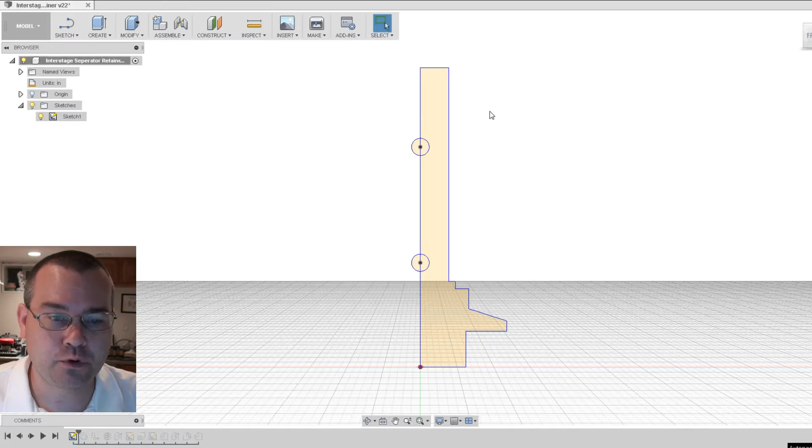Now anytime I see a part that has a round feature to it, I instantly think revolve. So revolve is the easiest way to sketch a round part that has some type of profile to it. So I first started with a sketch, and I measured out the part and then sketched it to generate its profile. Then after we've got the profile, I did a revolve. So very quickly and easily with one sketch, we were able to generate the general profile for the part.

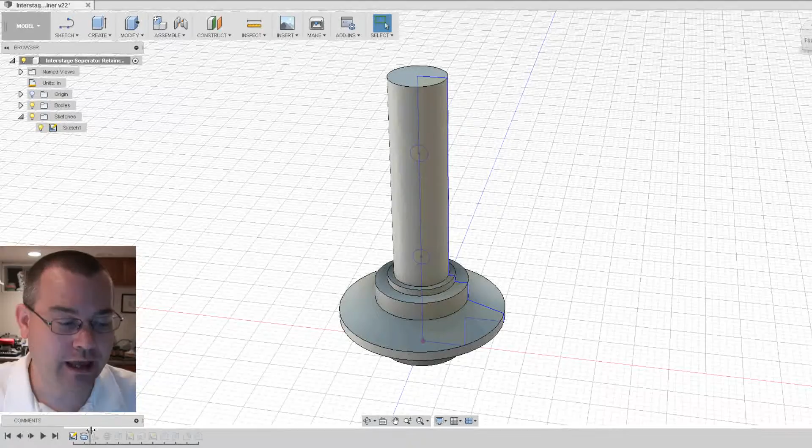Once we have that, it's pretty easy to just go through and start adding the extra features that this part has. So the next step, I made the revolve into a component, and then we added the thread. The thread option on Fusion 360 is actually pretty cool, how you can just do a depiction of the thread on the part. The one thing that I wish that they would do though, and you'll see why later on, is when you tell Fusion 360 to generate the thread but not actually model it, only project it, they don't give you a lower edge here. And that would be pretty handy to have, that lower edge.

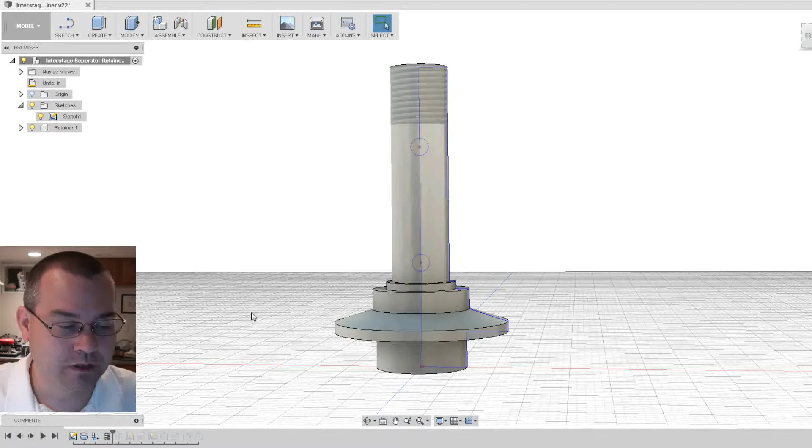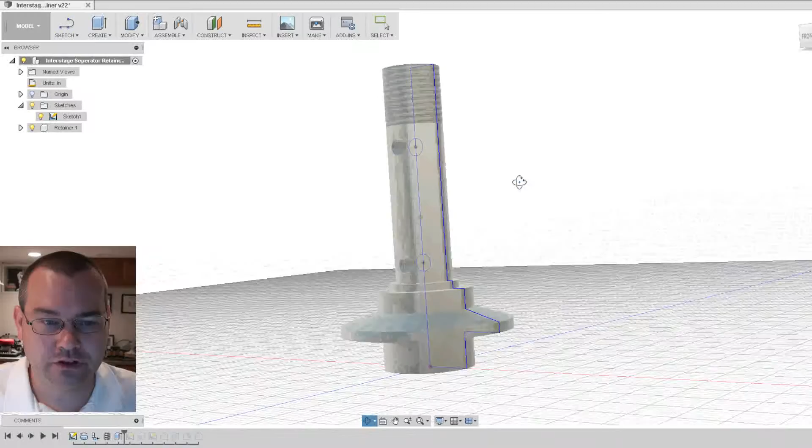So then after we have the thread, we're going to do an extrude. Now what I did is when I sketched the part, I also sketched those cross holes in it that are here and here, and then I just extruded the holes through. Now those aren't too critical. We're actually not going to cam those holes. They're not precise holes, they're not critical holes, they're just for airflow. So I'm just going to put those holes in with a drill press after the fact. So they're not going to be a big deal.

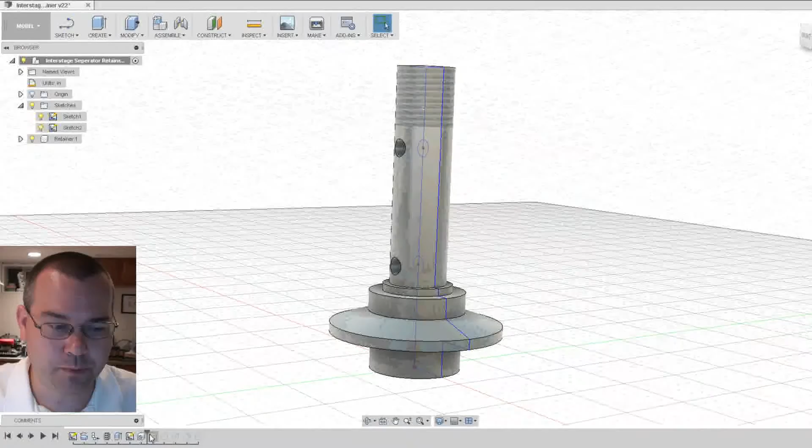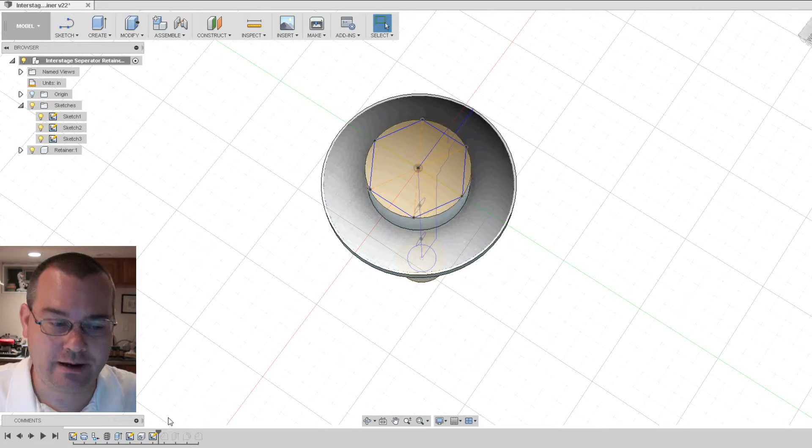So then I generated another sketch, and this sketch is just on the top to make the hole that goes through the part. And then we made a hole there, so there's the hole that goes all the way through the part. Then I generated a third sketch, and that's going to be for the hex bolt on the bottom. Now before you extrude this, I did a chamfer. And the reason why I did this before I extruded it is I have this nice edge right now that I can select and then chamfer. So we add the chamfer first, and then that just gives us a nice looking bolt head when we then do the extrude for the bolt flats.

Now anytime that I'm modeling and I have vertical corners here, because we're going to make this part on a CNC mill, it's easy to just add a radius to it, and now when you profile that part, it will follow the radiuses and deburr the part for you. So anytime you got a vertical surface, it's always good to throw a radius on there so that you get a deburred part right out of the machine. And no matter what machine you have, it doesn't cost you anything. It's just a slightly different tool path that it's going to take.

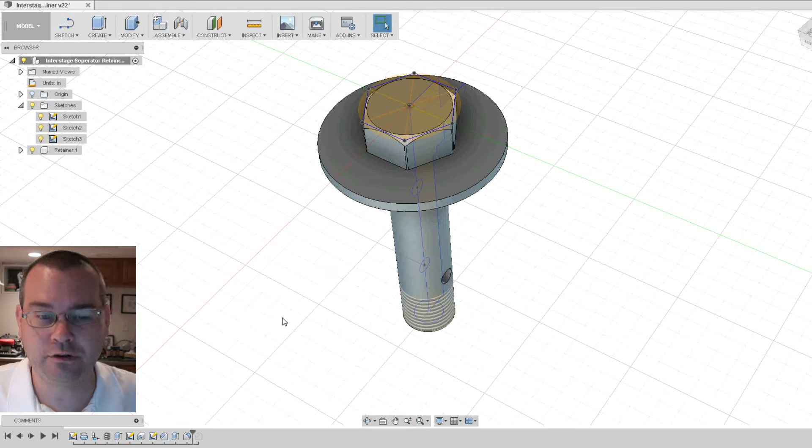And then the last operation is just to put an inside chamfer on this hole here. Now you noticed I didn't chamfer any other edges on the part, and I'll show you why in the cam. This is another weirdity with Fusion that I wish we could get fixed as well. And if you have a sharp edge, the chamfer tool paths are pretty good. They work well.

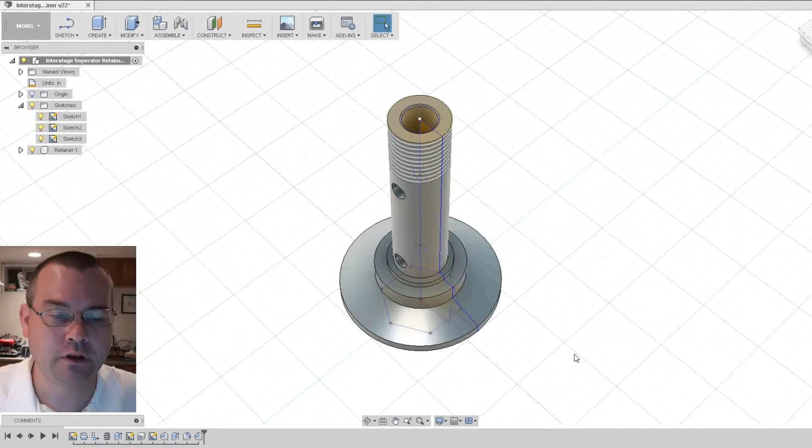But as soon as you model the chamfer, you start getting some weirdness in how you select the chamfer to be machined. And I'll show you that when we go to CAM the part. So there's all the modeling for the part. And again, it's a round part, except for the hex head on the bottom and the cross holes.

This is screaming lathe, but you know what? We got a mill. We want to make the part. We'll make the part. It's not that big of a deal. We'll be able to make it pretty good. We can get concentric circles that are interpolated within about 5/10, so it's good enough for this part.

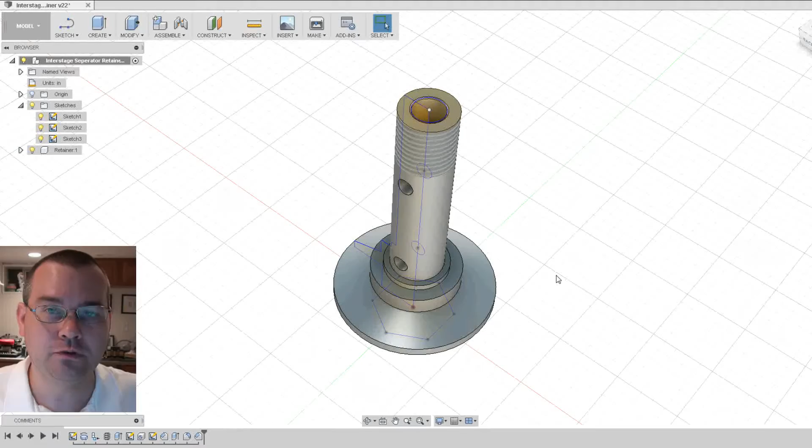So that's the modeling. Let's go over to the CAM side and talk about how we set this up and how we're going to run this part in CAM and then in the machine. So let's do that next. So we switched over to the camming environment, and let's talk about the setup first for this part.

So anytime that I'm going to make a part, the first thing I do is I look at the finished part and I think to myself, looking at this finished part, what's the easiest way to hold this part when it's finished? And that answer drives a lot of stuff. So in the case of this part, my feeling is that holding on to this bolt head is going to be my best option.

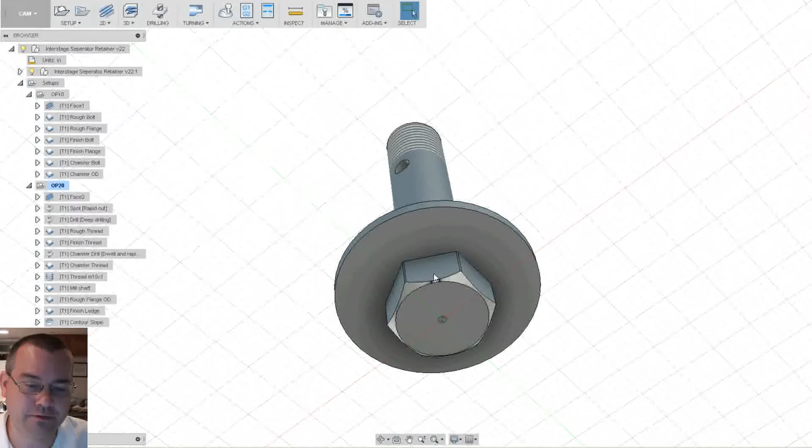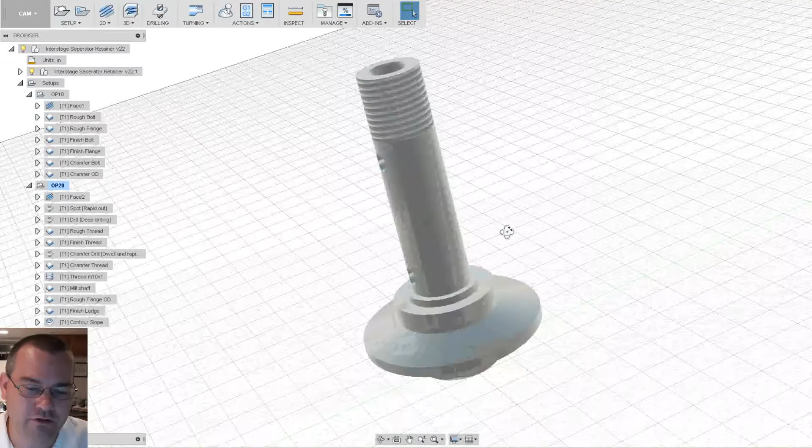So I think what I'm going to do is, almost every part you make is going to be two operations. So I'm going to do this part of the part as operation 1. I call it op 10. And then this side of the part will be operation 20 or op 20. So in my setups, I've got op 10, and then I've got op 20, and I have my stock configured.

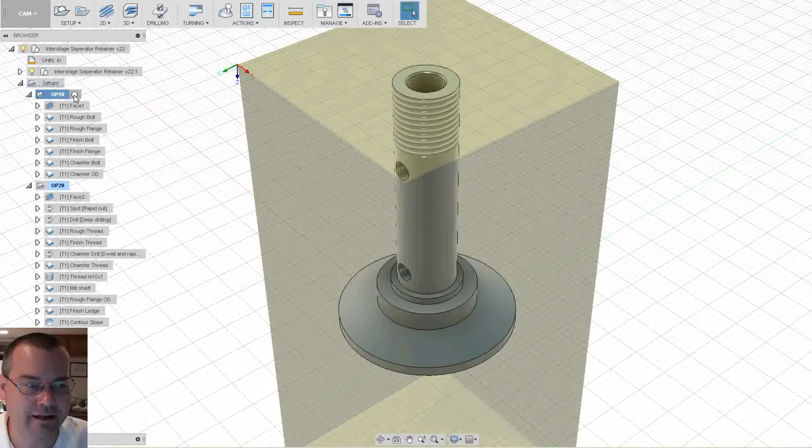Now, I just went out to the back and grabbed just some general stock to make this part out of. So I've got kind of an oversized piece. I'm not going to bother to throw it in the bandsaw. We're just going to go at it with the 2-inch face mill, and we'll just buzz the top of that thing off really quick.

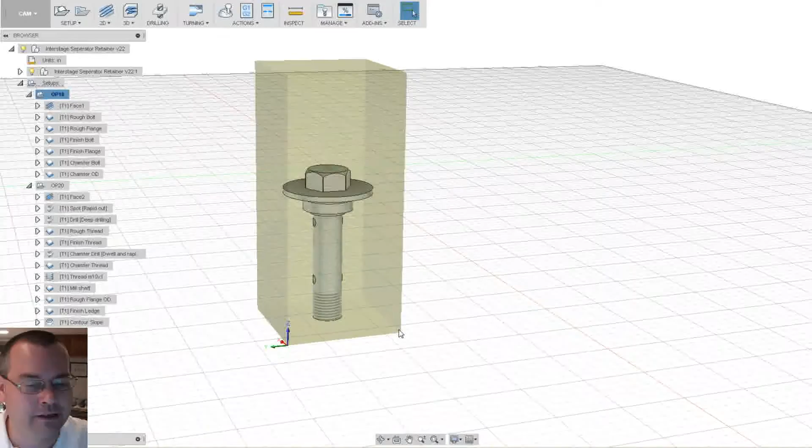So for my first operation, I'm just going to hold the raw stock in the vise starting about here, and then this whole thing is going to be in the vise. So I got a really good hold on this. It's not going anywhere. So I can just go whole hog at it. So we're going to use the 2-inch face mill, and then there's the tool path for it already.

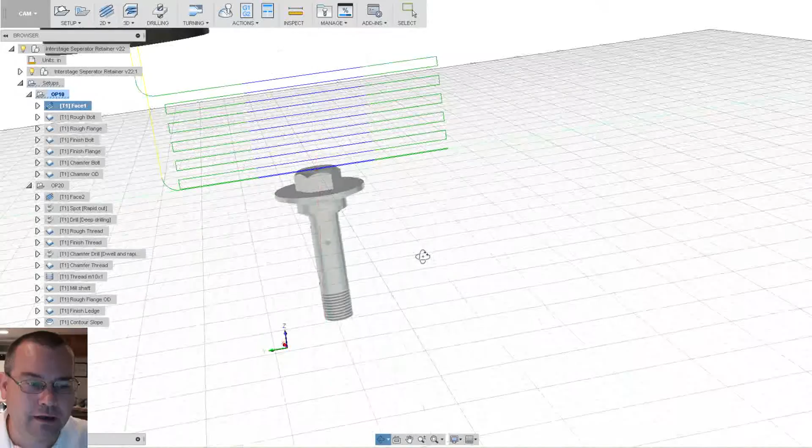And we're going to go at this at like 100 inches a minute with an 1/8 of an inch step down. It's like a 7 or 8 thou chip load. So we're going to throw some power into this thing and just rip the material off. That's all we're going after. And then, my mouse keeps sticking. And then at the end, we'll slow everything down and just do a finish pass so we get a nice finish.

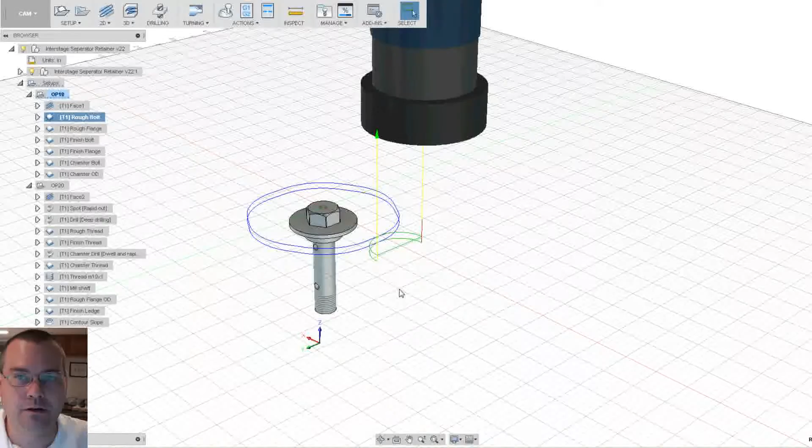After that, we're going to stick with the same 2-inch face mill and then rough the stock out. Now, a lot of people will want to switch to tools that are more right size for the task. In my mind, right size tools is the biggest tool that I can fit in there to get the highest rigidity and just rip the material out of there.

Again, we're going to take 100 inches a minute, we're going to step down an 1/8 of an inch, and we're just going to get rid of this material. We've got a good hold on the part, we got tons of rigidity in the tool, it's an insert-based tool, so we get good tool life, lower costs. We're just going to rip the material off. Why change tools?

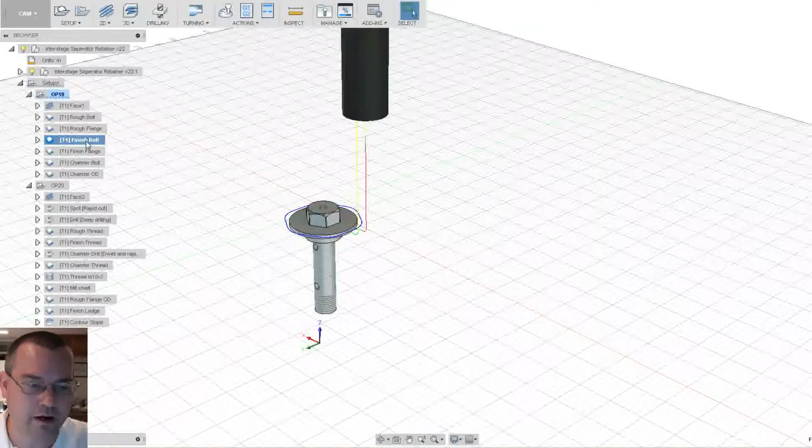So we're going to do that with the bolt, we're going to do that with the flange, and then now we're going to switch over to a finishing mill. So we're going to switch over to a 3/4 inch square-ended standard end mill. We'll walk around the bolt head, we'll walk around the flange, then we'll add the chamfer to the bolt head.

Now, here is where the chamfer thing comes into issue. You've got two options when you're doing chamfering in Fusion 360. And option one is the 2D chamfer toolpath.

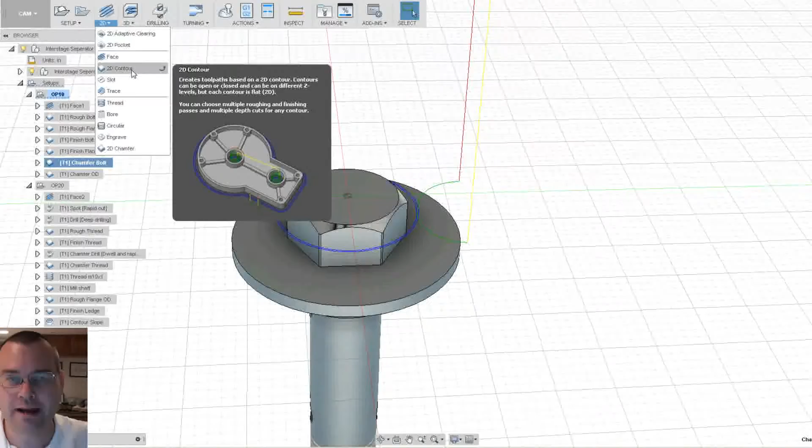Option two, before 2D chamfer appeared, was that you do a 2D contour, and then when you select the chamfer tool for 2D contour, it allows you to specify the chamfer width, just like the 2D chamfer toolpath. Now the difference between the two of them is that if you do a contour and there's an obstruction in the way from like a corner or another sidewall of the part, or the part goes up a little bit where the chamfer mill will run into it and smack it, the 2D contour won't detect that and it'll just break the chamfer mill off for you. So you got to watch out for that.

The 2D chamfer toolpath won't do that. It will detect that, oh hey, there's a wall there, or there's another feature on the part there that's preventing the chamfer mill from safely making that geometry, and it will stop and walk the chamfer mill out for that instance of the profile. So those are the differences. There's pros and cons to each one of them, and I use them kind of interchangeably depending on what I'm doing. If you have the chamfer modeled already, I find it better to use the contour toolpath rather than the chamfer toolpath.

And then to get it to work, for some strange reason, I use this stock to leave, and I set the stock to leave to the same as my chamfer width, and I select the top of the chamfer. And what the stock to leave will do is it will force the toolpath to go to the outside of the chamfer, and then the chamfer will be correct and your toolpath will end up correct.

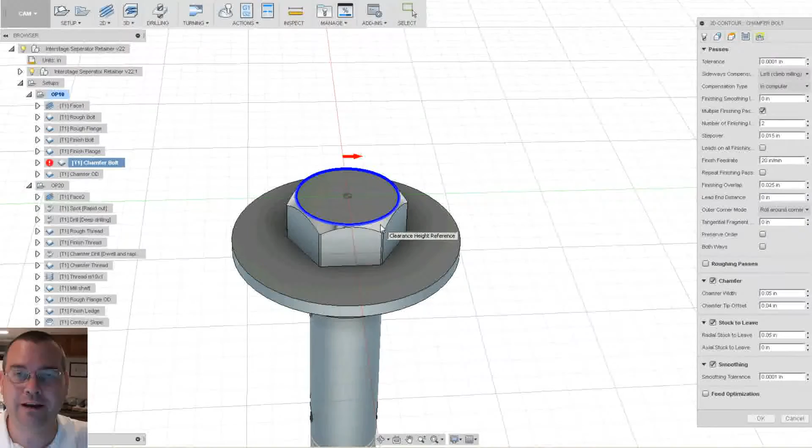So it's kind of weird how it works when you have the chamfer modeled. Other CAM packages that I've used, you just click on the face of the chamfer and it does it. I don't know why Fusion doesn't do that, but you know, it would be nice if we could just click on the chamfer face and bam, you got a chamfer. So that's the kind of weirdness for the chamfer.

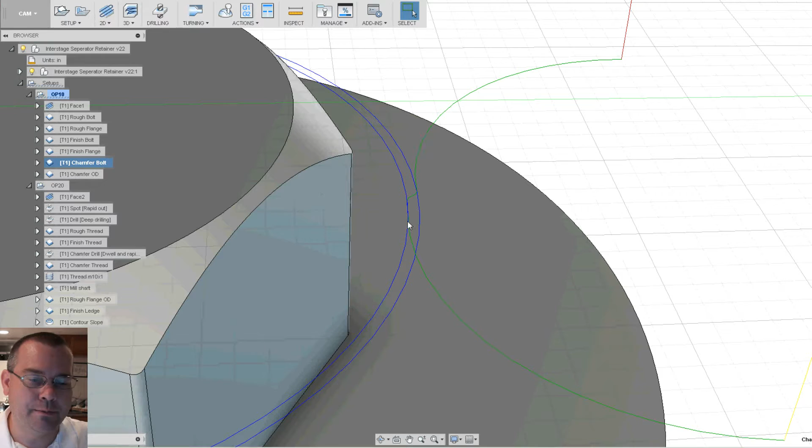The other difference is, if you notice here, I'm going to go around the horn twice here. And the reason for that is that's a 50 thou chamfer. I'm using a 1/4 inch chamfer mill. It's a little bit too much material to bite off in one shot without chipping up your carbide. So I'm going to take 2 whacks at this to finish it up. The 2D chamfer toolpath won't allow you to take multiple passes. It's just not in there. Okay, so again, that's the difference between contour chamfering and 2D chamfer toolpaths. Use whichever one's going to work for your specific instance.

So then after we chamfer the bolt head, we're just going to throw a chamfer on this edge here. I try to do as much chamfering as I can in the machine. Let the machine do the work for you. Put the material in, press the go button, get as close to a finished part out as you can. Okay, so that's going to be our first operation.

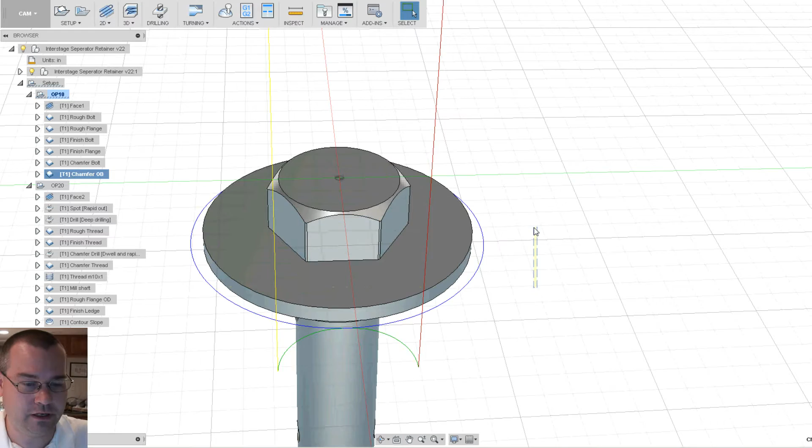Now, for my zeros, if we highlight our operation, you'll see that my X, Y, and Z zero are on this back corner. So when I go to put this in the vise, I'm going to set the 0 in the machine as the bed of the vise, and then I'm going to set my XY0 to the back corner of the jaw, and then I'll put a little hunk of metal over here to space it so I don't cant my jaw when I tighten down on this. Then I just throw the material in, tighten up the jaws, press go. Got a good 0, we're good to go.

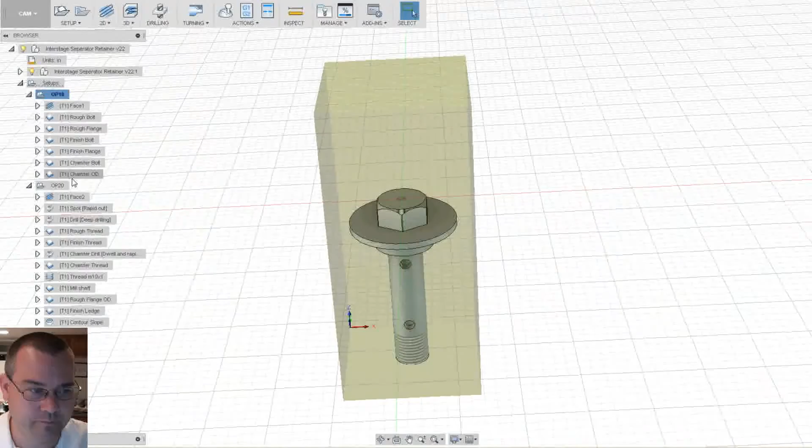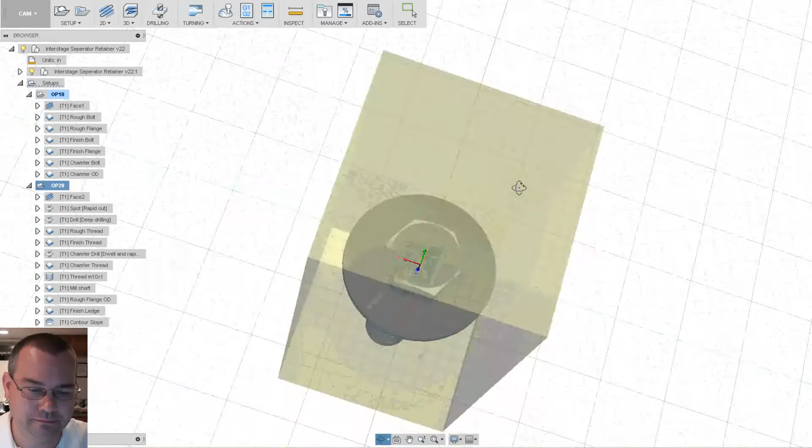So now once we have that operation done, it leads us on to Op 20. Now Op 20 is going to be a little bit more difficult. What I did here is this plane is going to be Z0, and that's going to be the top of the vise jaw. And then I made the XY0 the center of the part. And the reason why I did that specifically is so that when I flip the part over, I'm going to have a pretty good surface here because I actually drove this toolpath for this contour down past this flange as low as I could go without hitting the vise jaws.

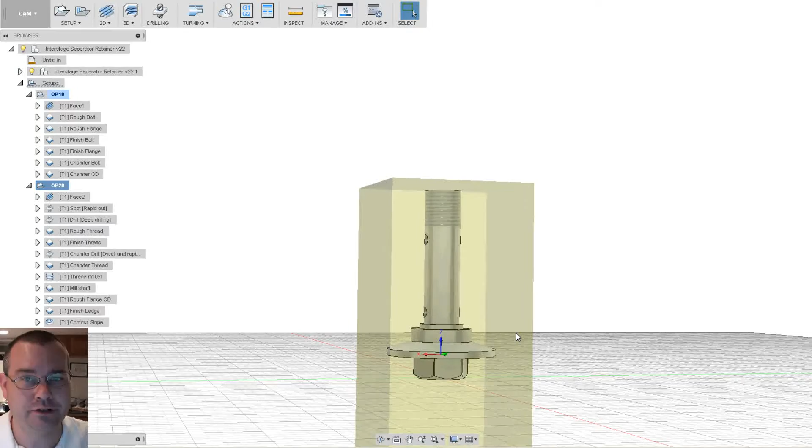My vise is just a Kurt D688, so the jaws are roughly 1.75 inches tall. So that's what I use for a number so that I make sure I don't run into my vise jaws. I don't make the extra effort to model the workholding unless I'm doing fixturing or some complex workholding. If I'm just putting the part in the vise, you know, if you're having trouble figuring out what your vise jaw clearances are, maybe we should study a little more.

Okay, so what I'm going to do is I'll just take a test indicator and just sweep this bottom part and then zero in that way. So that's how I'll find that zero.

Now the top of this part is actually pretty challenging. And it's not challenging because it's complex geometry or it's hard to make. It's challenging because you need to think about rigidity and chatter. If you recall our 100th subscriber plaque, we underestimated our rigidity a little much, and we got some chatter with the big face mill we were trying to do. So anytime you make a part, you have to always keep this in the back of your mind.

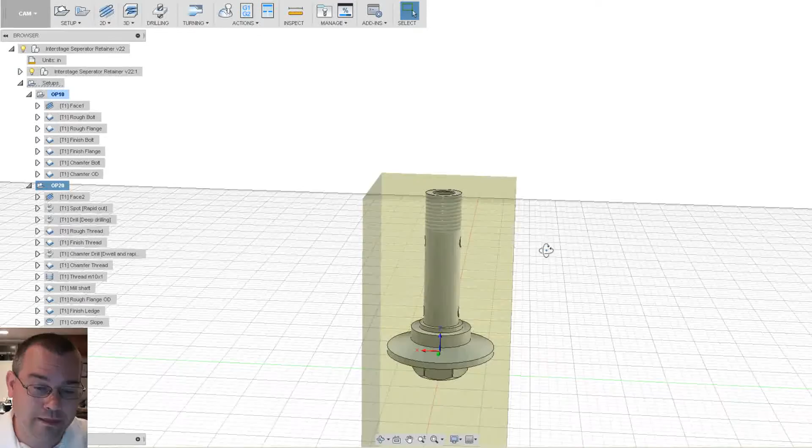When this is in its raw form of stock, this is about 1¼ inches by 1¼ inches, and it's sticking up about 1.5 inches. That's going to be pretty rigid. It's not going to be bad. As soon as I rip all this stock off and get down to this tube here, which is about 1/4 inch in diameter, the rigidity of the part is gone. It's gone. So we want to think about that during our machining operations.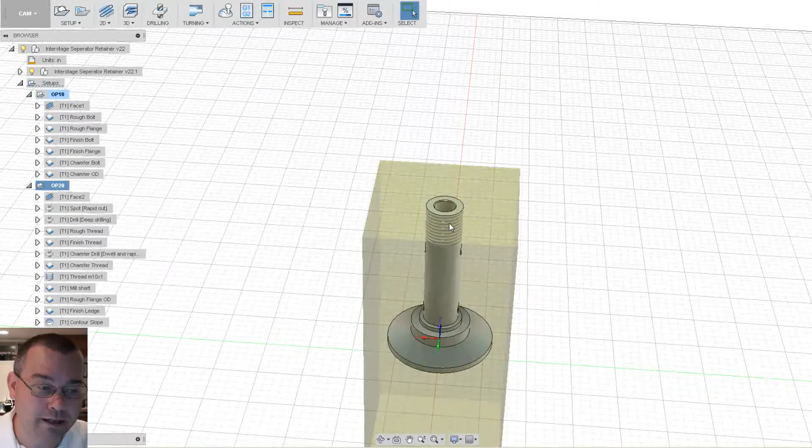And if you're doing lathe work, same thing applies. As you turn this shaft down, this is going to start getting flimsy. Okay? So we want to keep that in mind while we're doing our tool paths. So what we're going to do is first, we're just going to face it. We left a little bit of stock from op 10 on the bottom, just to get rid of our saw marks, square it up real nice, and face it. Then after I face it, I'm going to spot it and drill it.

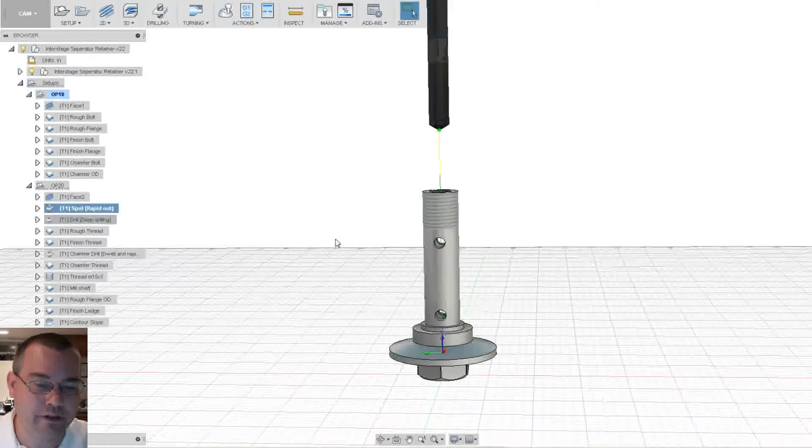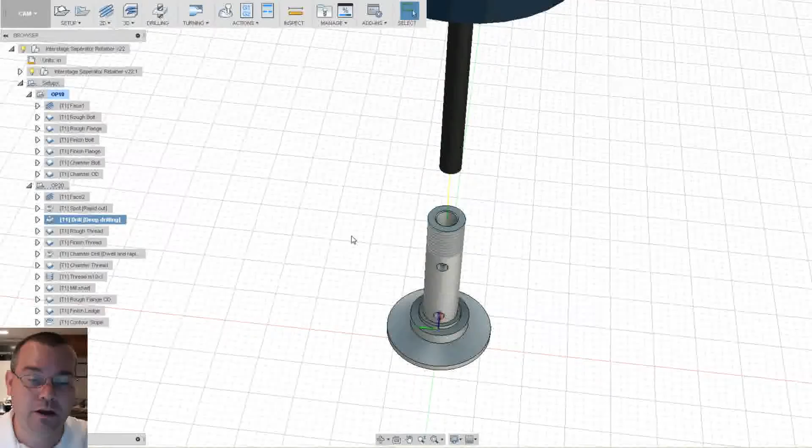Now why would I want to drill the center out first? Well, a tube is much more rigid than a solid bar. And if you don't believe me, you can do some experiments. You can take a solid rod and a hollow rod and support each at each end, and then put the same amount of weight on each of them, and you'll see that the solid rod will sag much sooner than the hollow tube. The hollow tube typically won't deflect, it will just catastrophically fail. So by drilling this hole first, we're going to help our rigidity problem. So that's why this is one of the first operations, to drill the hole.

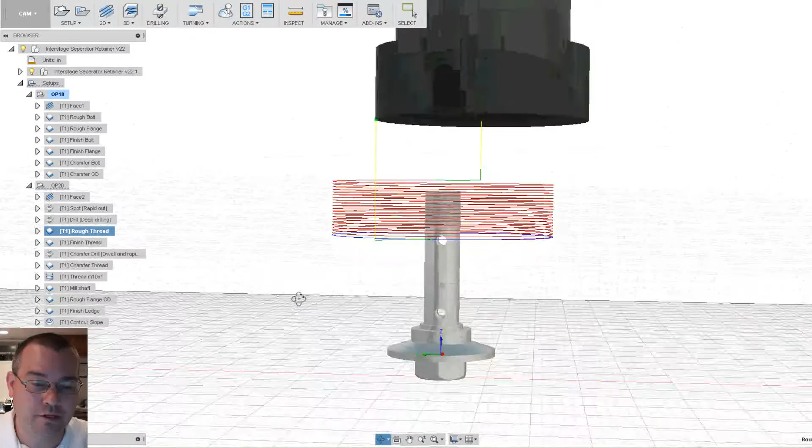Then what we're going to do is we're going to switch back to our 2-inch face mill again. It fits, why not use it? And we're going to employ a little bit different of a tool path. So this is also why I'm using the 2-inch face mill. Rather than using a standard end mill and trying to mill as far down here as possible to use as much cutter as I can, again, we're thinking about tool life here, I'm going to use a face mill instead, which is designed to only cut thin slices off at a time, and I'm going to spiral this thing down and just peel off all this material around this tube.

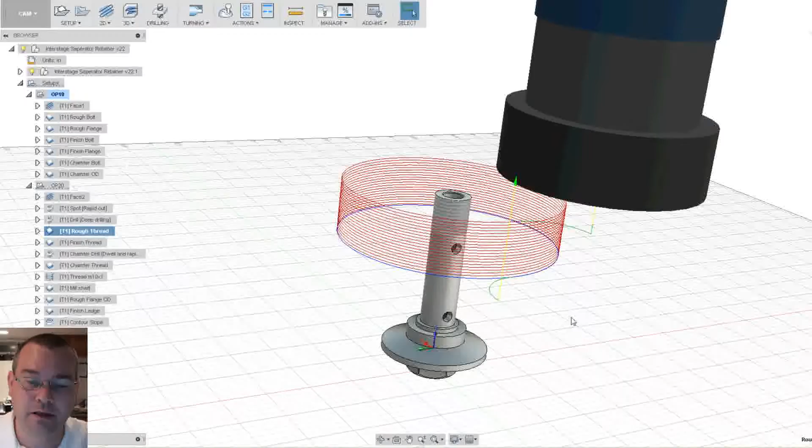So my cutting forces are going to be concentrated down here where the part's more rigid and I've got all this stock left. And notice I'm not doing the whole thing yet. I'm only going a little bit farther than that thread. Okay?

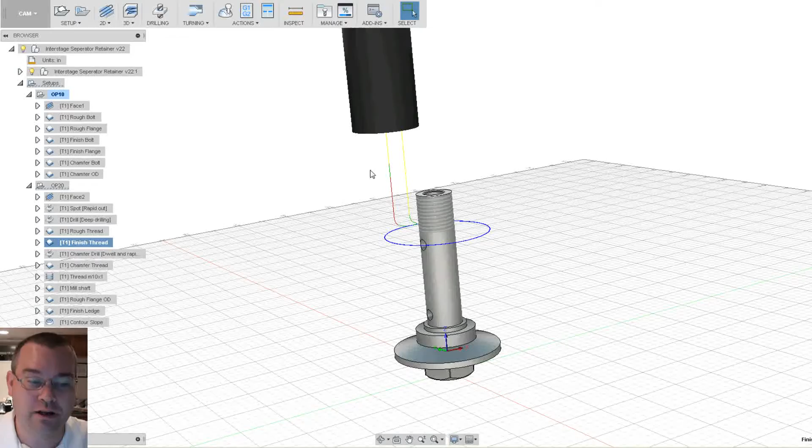Now once I do that, I'm going to switch over to a regular mill, because that face mill has a pretty large radius in it, and it's not going to give a good finish here. So I want to switch to a regular mill and then just finish this one little part here. I want to chamfer it, and I want to thread it. And the reason why I want to do all that now is, again, it's all about rigidity. I've got all that stock down here that's making this part rigid right now. I just have this little tiny 1/2 inch piece sticking up. It should be rigid enough to complete all these machining operations without chattering.

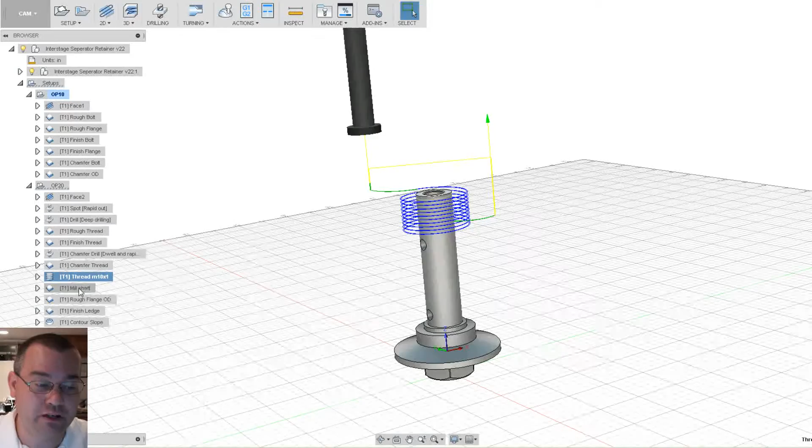Then, and only then, when I have all these operations finished, am I going to rip off the rest of the stock. And this is the only operation that I'm going to do. I'm going to use the 2-inch facer, and we're just going to spiral down this thing all the way down to the bottom. Now you ask, well, is that going to take a lot longer to machine it? It's going to take a little bit more time, but not as much as you think. So again, I'm not going to be running this at 100 inches a minute, taking 1/8 inch at a step, okay?

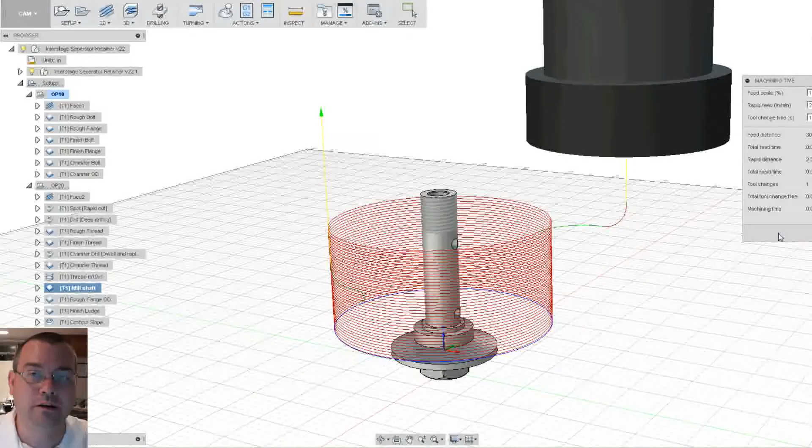I'm only going to be running this at 50 inches a minute, and I'm only going to take 30 thou at a step, so much, much lower cutting forces here. Again, I'm really concerned about rigidity for this part. But even that, this operation is only 6 minutes. So in the grand scheme of things, again, we're making 2 of these. We're not making 100 or 1,000. We're making 2. So keep that in mind as well when you're trying to figure this out.

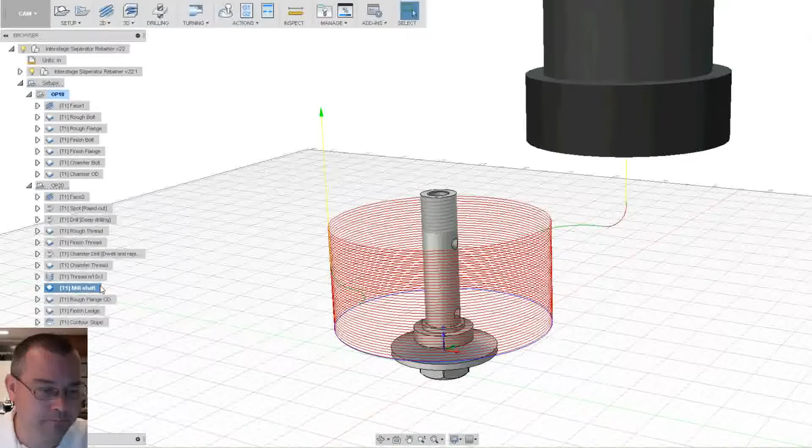If I were making 1,000 of these, I would not be milling them. I would send them out and have somebody else with a lathe make them. It just doesn't make sense to make a lot of these on a mill. 2, yeah, I got a mill, we'll make it. Okay? So then once our shaft is milled, then we'll do that flange here. We're not going to do this area here, because, again, this face mill has a very large radius on the cutting

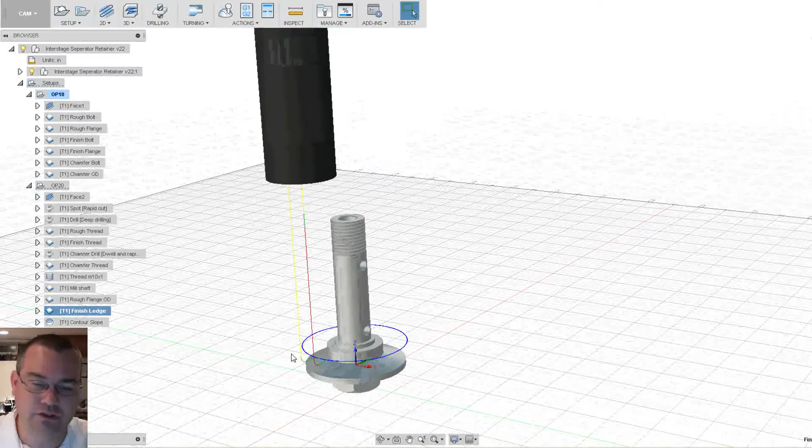edges. Then we're going to switch to a standard end mill. So again, this is just our 3/4 square-ended end mill. And then we'll do this face here. I'm not going to worry about this face here. It's okay if there's a radius there. The moisture separator sits on this face and then it centers itself on this edge here. So that's the critical dimension of the part. If there's a fillet in here, it actually is going to make the part stronger. So we're not going to worry about cleaning that up at all.

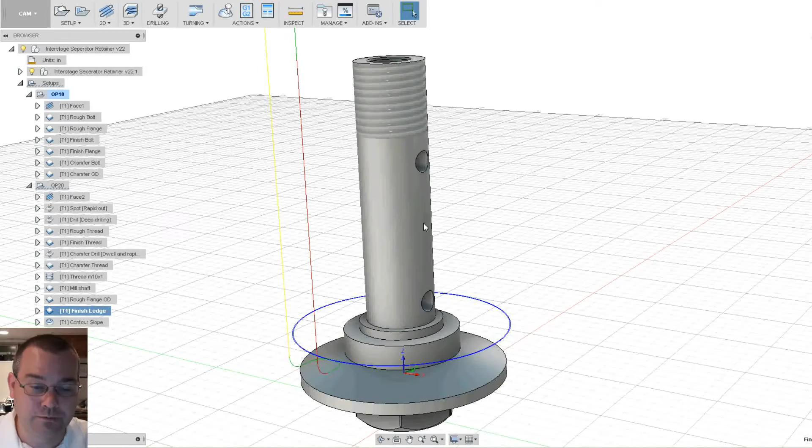And again, once I take all that material off, I don't want to touch this thing, because as soon as you touch an end mill to this whole length, it's just going to take off and start singing on you. Yeah, the surface finish from the face mill isn't going to be the best, but it doesn't matter. It's inside of a moisture separator with a sintered bronze element over it. You're never going to see it. It's going to have no bearing on the function of the part at all whatsoever. So that's how we're going to make this part easily.

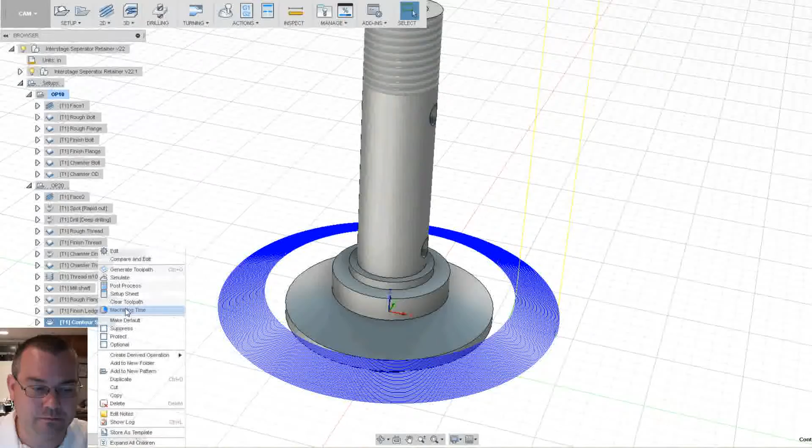Then the last operation we're going to do, this little slope here, I think is pretty important. It helps channel the airflow inside the moisture separator. So we're not going to do anything fancy with a bullnose mill or a ball mill. We're just going to do the square-ended mill, and we're just going to take thousandths of an inch chips at it and just chip it off. Again, we're making 2 of these. The machining time is 9 minutes.

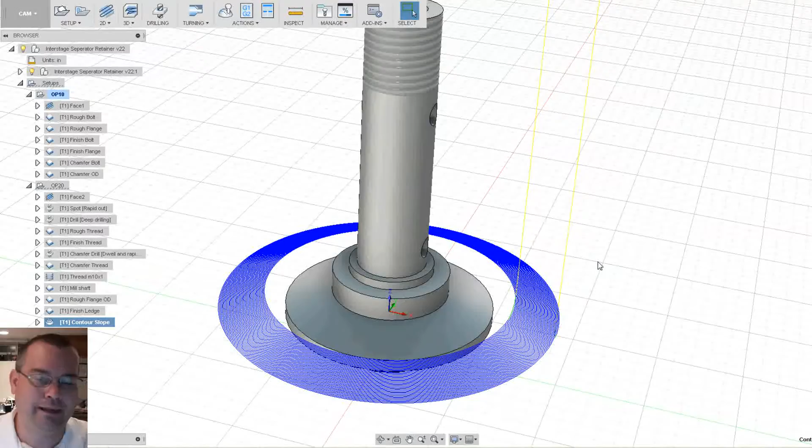It'll take me longer to get a ball mill, or I would have to use a bullnose mill to be able to get this geometry correct. And it would have to be a fairly small radius bullnose mill. Again, adding an extra tool in the machine, setting up an extra tool for saving 9 minutes per part, so you're saving 20 minutes. I'm making 2.

So that's my general thoughts on how I go about figuring out tooling operations, setup operations. We put quite a bit of thought into how to make a part ahead of time so that when we make it out to the machine, we can make that part successfully the first time. Your production volumes of parts will dictate how you code and CAM your parts. In this case, I only need to make 2 of these, so I'm not looking to make this part the fastest, most efficient way. What I'm looking to do is make it reliably so that I can get it in the machine, get it made, and get it out of the machine the first time.

Yes, I'm a little conservative, and that's okay, because if I try to push a part where I'm only going to make 1 or 2, and I make a mistake and I push a little too hard, now I've just doubled the time it took me to make that part, because I have to set it up again, get some different material, etc. So your end goal will drive how you CAM a part.

So I hope that you found this video helpful, and you can kind of see my mindset of when I CAM a part. Your solution may be completely different. That's one of the really cool things about machining, is that every machinist comes up with a slightly different way to make the part, but at the end of the day, the part gets made, it's to print, and the customer will be happy. This part is my part, so I'm the customer.